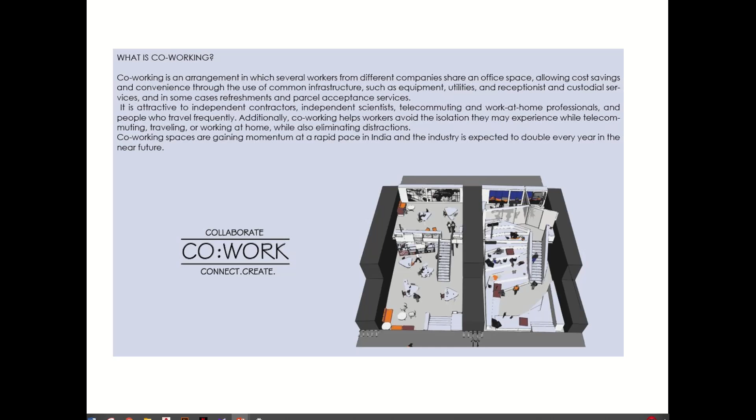So, what is co-working? Co-working is basically an arrangement in which several workers from different companies share an office space. It allows cost savings and convenience through the use of common infrastructure like equipments, utilities, receptionists, and custodial services. It is attractive to independent contractors, telecommuting and work-at-home professionals, and people who travel frequently.

With the rise of a new independent workforce, the office has switched from a place of production to a place of interaction. The need for physical office space will remain and be shaped by the following trends.

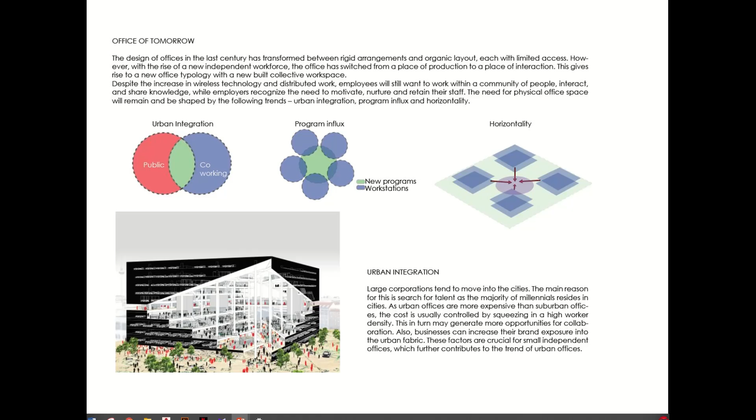Urban integration: large corporations tend to move into the cities. The main reason for this is the search for talent, as the majority of millennials reside in cities. Also, businesses can increase their brand exposure into the urban fabric.

Program influx: a study conducted by Knoll Incorporated in 2016 predicted that offices will be more casual to create a relaxed and open atmosphere. Surveys show that provision of amenities leads to higher job satisfaction.

Horizontality: organizational behavior of companies has shifted from a linear or hierarchical structure to a complex network structure. A study by Knoll Inc. predicted a rise in group-based work, leadership dispersion, and non-linear workflow in the next 5 years.

Independent workforce: despite the advancement of technology, it is still people who start and drive businesses. Hence, recognizing who the future generation of workers are and how they function is important. The best word to describe the future generation would be independence. This can be seen in the increase in freelancers and small independent businesses, as well as small units functioning separately from established parent firms.

So, moving on to the site. The site is located adjacent to Technocity Trivandrum, Kerala. The site is taken along the commercial edge proposed in the Technocity Master Plan. It is about 6.8 acres. The Technocity is spread across 500 acres, which includes not just space for IT firms but also residential, commercial, hospitality, medical, and educational facilities.

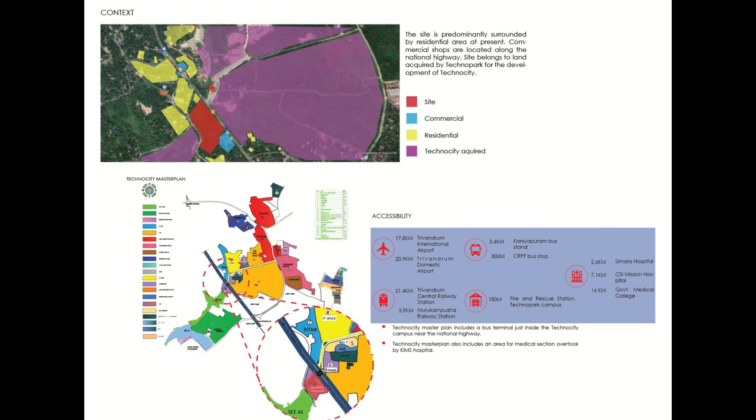So here is the Technocity master plan, and the site is taken along the commercial space given in the Technocity master plan. The site is about 17 to 20 kilometers away from the airport. The Technocity master plan includes a bus terminal just inside the Technocity campus near the national highway. It also includes an area for a medical section overtaken by KIMS Hospital.

So this is the site plan. As you can see, here is the National Highway 66 and here is the entrance to the Technocity campus. The site is heavily contoured, with about a 9-meter difference from the lowest level to the highest level. The site slopes down from the national highway, and the highest point is at the south side, which is about 10 meters up from the lowest point in the site, which is at the west side.

The existing vegetation: the site is thickly vegetated with trees and shrubs. There is a predominance of coconut trees in the site. Rubber plantations exist towards the south side in a heavy manner.

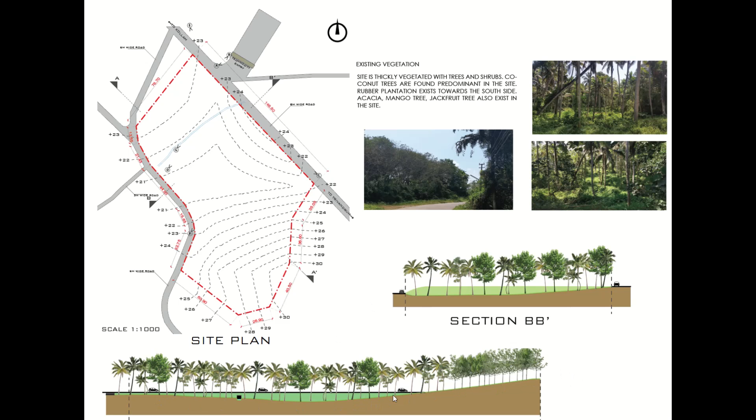So these are the site sections that we can see. The site slopes down from the south side. Here is the national highway. The site majorly slopes towards the southwest to the central part. The site slopes down from the northwest, northeast, and the south side.

The water drains towards lower ground. A small drainwater channel exists in the site. Heavy vehicular movement is observed on National Highway 66. The adjacent roads have low vehicular movement. Major views from the site are towards the Technocity and National Highway. Views towards the site can be given from the National Highway and the Technocity. The predominant wind direction is from southwest to northeast. There is a great amount of pollution noise from the National Highway adjacent to the site.

The current entry to the site is from the southwest side. Main entries can be provided from the National Highway, and service entry can be provided from the southwest itself.

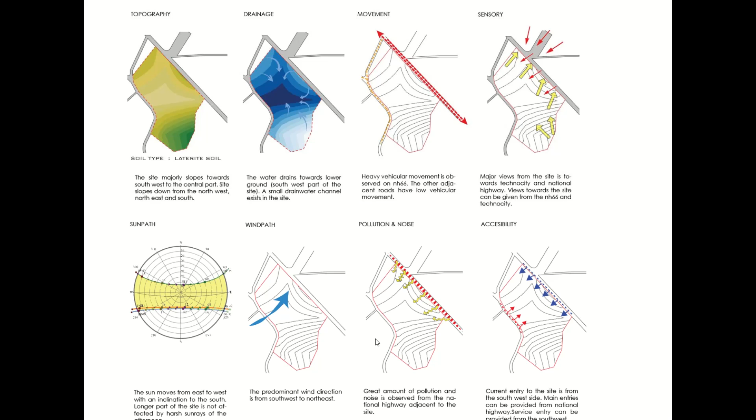Strengths: the profile of the site helps in natural drainage and also helps in directing the wind from southwest into the site. Location near the upcoming Technocity helps in the feasibility of the project. Being adjacent to the National Highway gives an advantage of easy connection with two major cities, Kollam and Trivandrum. The site is elongated on the east and west sides, which helps in bringing in light and reduces harsh rays from the southwest.

Weaknesses: proper water drainage should be designed as water drains through the site from nearby areas. Pollution and noise will be experienced from the adjacent national highway. As the site is sloping from the main road, providing views and vistas towards Technocity will be difficult.

Opportunities: as the site is sloping, there is an opportunity for providing basements. Due to the close proximity to Technocity, there is an opportunity for sharing of services and other facilities like bus terminal, medical, recreational, commercial and residential areas.

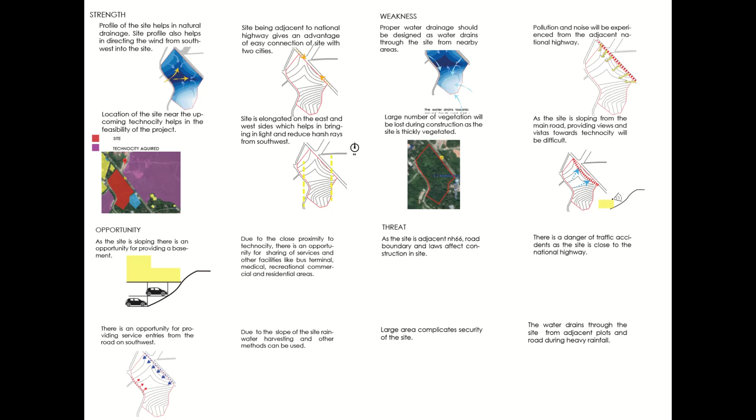Concept: collaborative cloud. The major concept of the design is to create a collaborative cloud, which is a void surrounded by spaces for collaboration.

The design involves interconnected terraces. Connecting open terraces with interconnecting bridges and stairs increases the chance of collision and collaboration. There is a gradual transition of spaces from public to semi-public to private spaces as we go from the collaborative cloud to the exterior of the building.

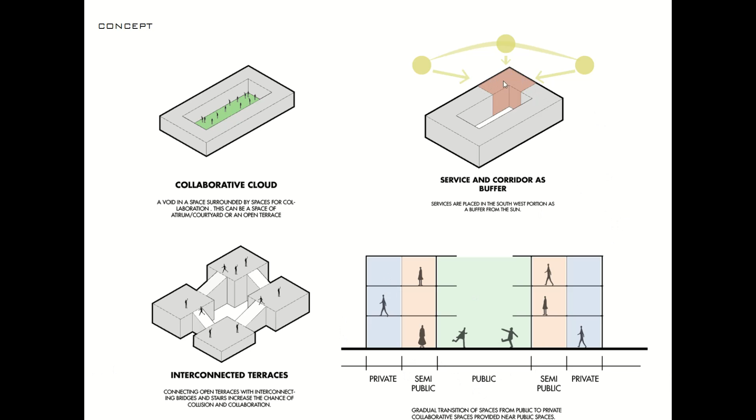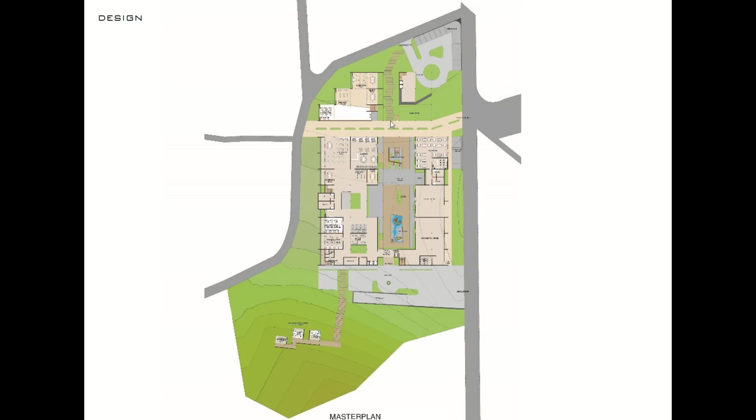The building blocks are divided into 4 blocks mainly by the use of the pedestrian path and the atriums. Coming to the basements, there are 2 basement floors. Basement 1 has the service entry. There is an access, with 2 stairs from the basements to the ground floors.

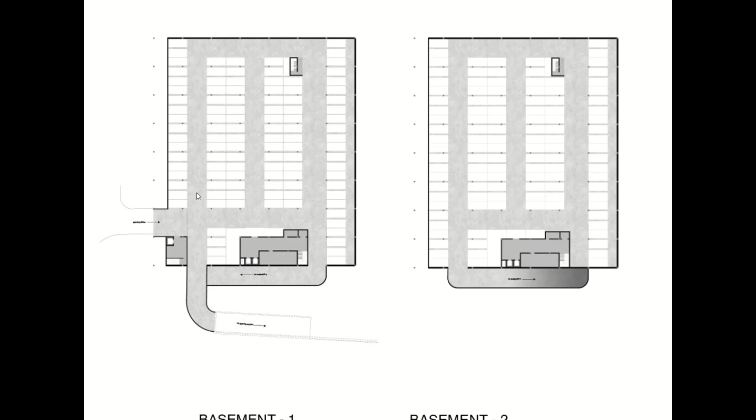The grid is 9 meter by 9 meter, and the road width is about 6 meters. This is the first floor.

Here, as you can see, here is the pedestrian pathway, and this is the atrium, which is the collaborative cloud. These divide the building blocks into 4 main blocks, namely the auditorium, the segregated offices, the main co-working spaces, and the common public spaces.

From the drop-off entrance, there is a reception and a waiting lounge. As we go in, we can see a few courtyards, which on the upper floors connect to the open terraces on different levels. All the blocks are connected by bridges on the upper floors.

The central atrium is the main collaborating cloud. Here there is a stage, a water body, a mount, and seating spaces.

So on the ground floor, towards the block near the national highway, we have a restaurant, an exhibition hall, and the admin offices. Towards the southwest side, we have the co-working spaces, which is provided near the atrium. And as we go to the outside of the block, we have the designated workspaces and the closed workspaces.

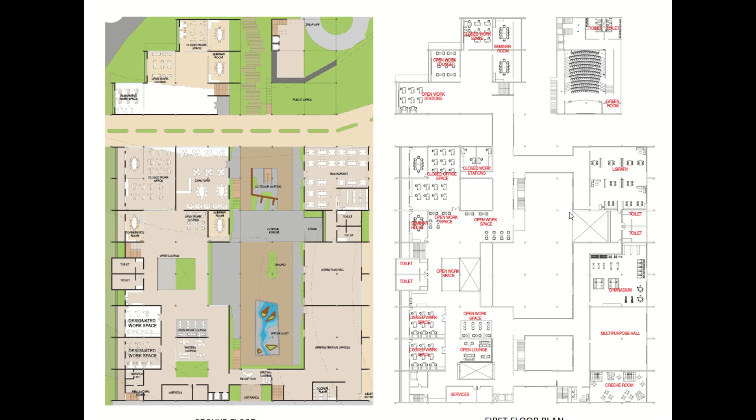Moving to the second floor, which is also connected by bridges for all the blocks, it has more office spaces and open terraces. There is a big conference hall which can be rented by anyone outside the office. The second floor has closed office spaces near the National Highway and a recreational space near the pedestrian path.

I have provided open terraces which open up as we go up towards the top floors.

Moving to the third floor, I have given a large open terrace space and a recreational space connected by bridges. The closed workspaces are the same as in the other plans. The open terraces connect with the courtyards as we go up through the floors. Above the auditorium, I have given a terrace garden which is accessible by the public.

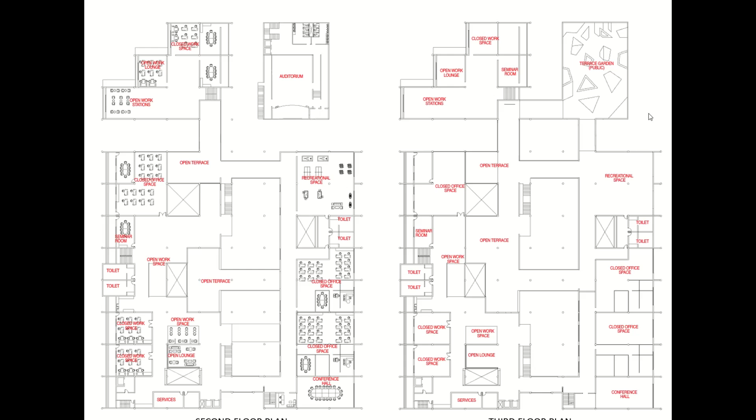So this is the sectional view of the building blocks. Here we can see the bridges connecting on different levels. This is the basement ramp.

The building is 4 floors up from the ground level and 2 floors down, which are the basement parkings.

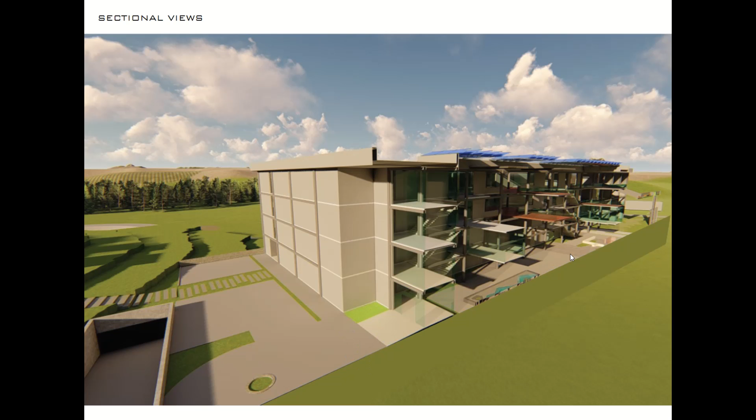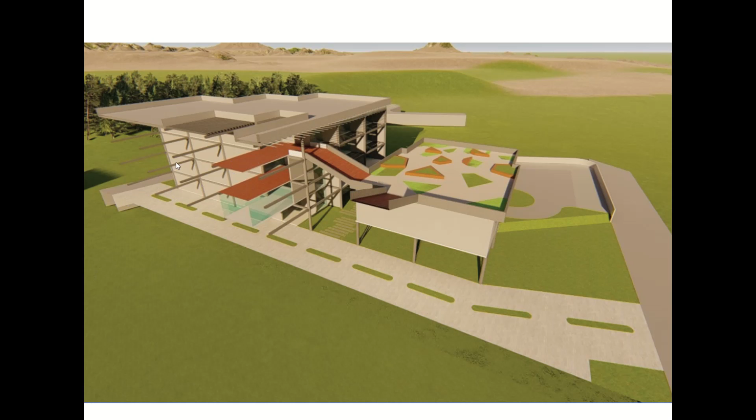This is a section view from the pedestrian path. As you can see here, the terrace garden, the block with the segregated offices, and the other open workspace blocks are all connected with bridges and open spaces.

This is a section through the atrium. We can see the bridges here and the open spaces marked here. Here is the heavily contoured part of the site which is thickly vegetated.

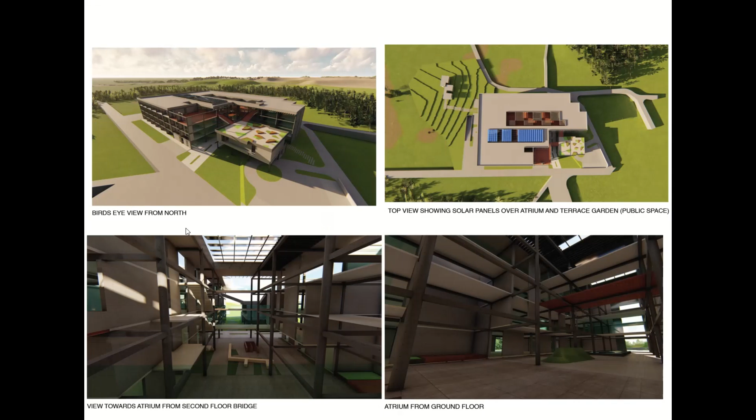This is a bird's eye view from the north. You can see the terrace garden, the open recreational space, and the bridges. Here is the pedestrian path that starts from the Technocity entrance.

From the top view of the site we can see that the roof of the atrium is covered by solar panels. Here is the heavily contoured part of the site with thick vegetation. I have provided segregated office spaces which are private.

This is a view from the second floor bridge to the atrium. This is a view from the atrium of the bridge. Here there is a stage, a mount, and a water body.

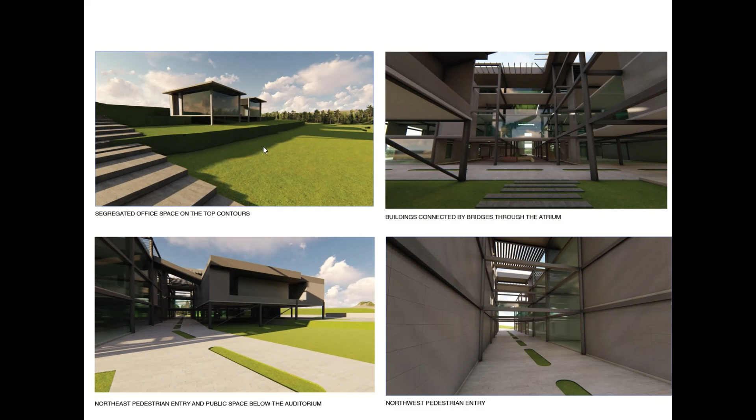These are the segregated offices at the top of the contours, completely away from the rush of the other blocks.

This is a view of the atrium and the pedestrian path from nearby the public space. This is the view from the pedestrian entry. This is the public space below the auditorium.

Here we can see the auditorium block, and the terrace garden is connected by bridges from the other blocks. This is the view of the pedestrian entry from the northwest, that is from the residential areas.

Special topic: collaborative spaces. Role of transition of privacy in collaborative workspaces.

Collaborative spaces are an important factor in the design of co-working spaces. They help in creating innovative new ideas and products through the interaction of innovators and executors with diverse cultural backgrounds, attitudes, and scholarly abilities.

These collaborative spaces can be differentiated by transition of privacy in each space. Once an idea is shared, individuals work in teams or seclude themselves from others to boost productivity and avoid distraction, as we can see here.

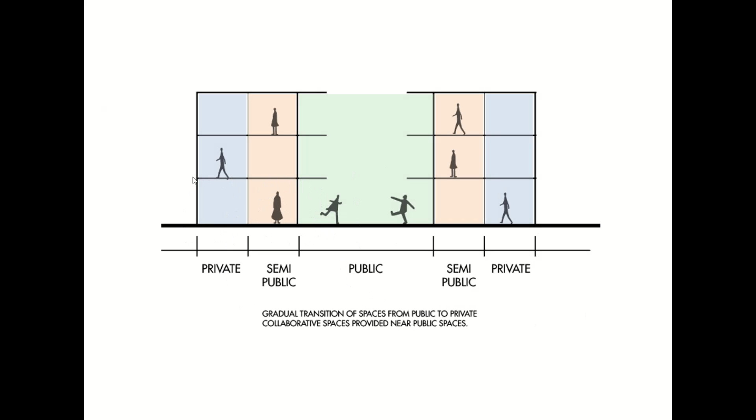So as we can see here, with maximum collaboration towards the public space and the semi-public spaces, the teams can work together, and in the private spaces they can work individually with maximum concentration.

So I've taken Google headquarters as my case study, and I've identified 13 spaces that they have provided for boosting collaboration. So here transition of privacy is carried out in the design.

The design of Googleplex was done by identifying 13 types of spaces for collaborating and differentiating them according to their transition in privacy. As we can see from this chart, there are 13 spaces, and the spaces that are marked hottest get the maximum collaboration.

The 13th space, which is the workroom, is the most private workspace. So this is the plan of Google headquarters. As you can see here there is a street, a public realm they have created, and the collaborative spaces decrease as we go towards the exterior of the building.

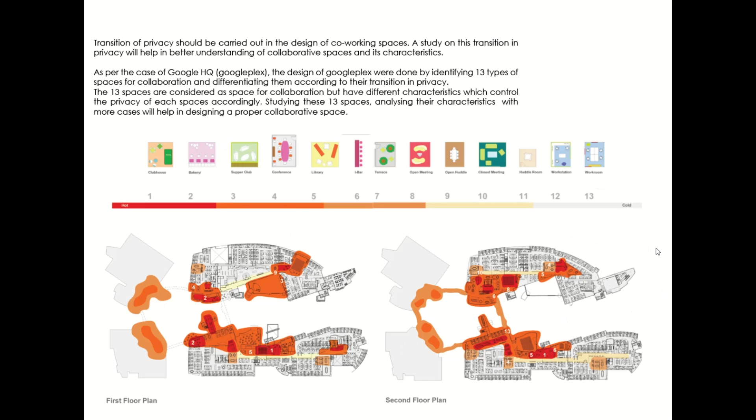So my special topic was about identifying these spaces and studying about them. So the 13 spaces and their characteristics: the first space, which is the most collaborative, is the clubhouse.

These spaces are done for nomadic work. They have high opportunity for chance encounters. Then there is a bakery or coffee shop, which is a space for active nomadic work, with high opportunity for chance encounters and collaboration.

Then there is a supper club, which has an alternative dining setting for focused collaborative work. Then there is a conference room, a focus space for larger collaborative groups, with projection capabilities and whiteboards.

Then there is a library for quiet nomadic work and a visitor workspace. Then there is a bar, which promotes active nomadic work and a visitor workspace.

The terraces contain quiet alternative nomadic work and a visitor workspace. Then there is an open meeting space, which includes quiet nomadic work, visitor workspace, and promotes team collaboration. There is an open huddle room for team collaboration.